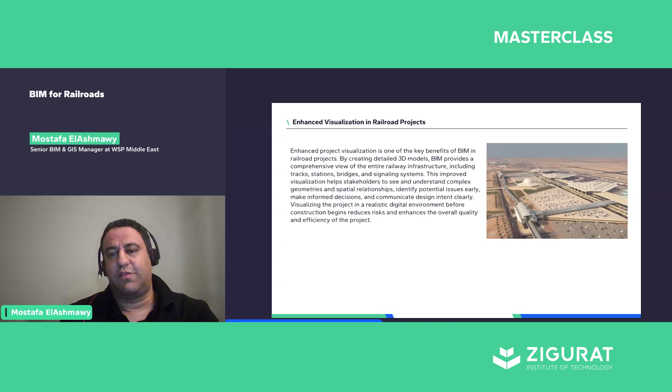Another important part is design coordination, and it's a fundamental benefit for using BIM in railway, involving all the engineering disciplines in the same space in a proper common data environment, enabling them to collaborate. In today's world you have designers scattered all around the world, and you need these teams to work together in an efficient way. You can't do this without BIM and a proper common data environment that hosts the BIM model with cloud-based solutions.

This is where various engineering teams can work together, including the structural, electrical, mechanical teams, and also the specialized teams that can have their specific BIM models for any miscellaneous equipment or wagons, for example, or any other elements of the railway modeled in BIM also.

BIM addresses this challenge of coordination by integrating the designs of all disciplines into a single federated place. If you previously had a look at ISO 19650 standards, when it comes to coordination and federation of models, the example used in these standards is a railway project where a volume strategy should be developed at early stage to ensure spaces are reserved for specific systems inside the cross section of the railway, to enhance collaboration and enhance clash avoidance.

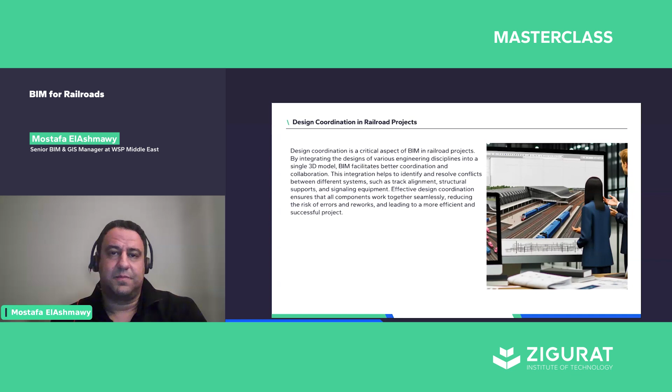Yeah, and as we speak about coordination, for sure we must mention clash detection. Clash avoidance is an important concept when we are designing a railway project, and it's one of the aspects that's usually developed at early stages. So imagine you are developing a railway in a tunnel, for example. Every service has its allocated location from an early stage.

I would say that clash detection is not something very specific to railway, but as I mentioned, the size of the project means such saving using clash detection from early stages is multiplied when you talk about railway projects.

Parametric design in railway is also one of the advanced features that BIM offers, and it offers a significant advantage for railway projects because it's not only about going and modeling and drafting every single detail, but there are values that can just be added to develop the model quickly, saving a huge amount of time in that development.

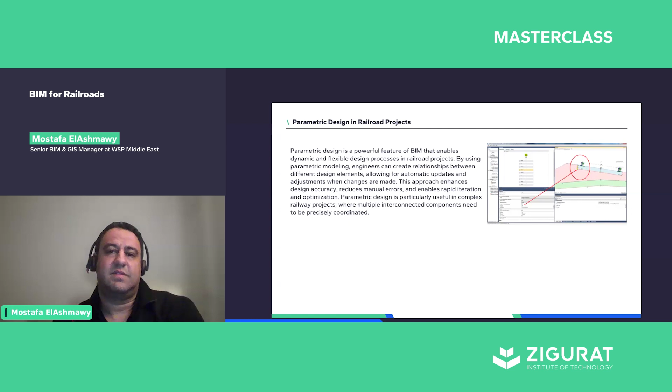Once they input the new values, this saved them huge time and also avoided them waiting until they had all the information. So they were able to start with some dummy data, and then once they had the proper information, they were able to complete their work.

Enhancing design accuracy is an important part that BIM adds to the process. It doesn't require a lot to mention that having the elements developed in 3D, and having the views reflect any change at the same time, enables designers to have an accurate and more efficient way of developing the finer details.

One of the important aspects that BIM adds to the process is improving stakeholder engagement. As I mentioned, using BIM, it's much easier if, for example, you used a platform like Autodesk Construction Cloud or Revizto or whatever solution. It's much easier to ensure that everyone has access, and even some platforms currently don't require advanced BIM use.

You can enable access to the in-progress design or the approved versions of design to any kind of stakeholders, the usual stakeholders in construction projects, and also the community itself. You can enable the community to see how such a railway project will impact their current homes, their current commuting, and all aspects of their life.

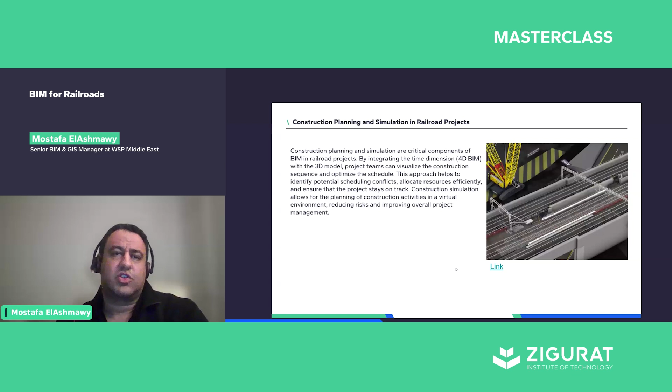Using 4D in such a project is not only about having a simulation of the project from start to end, but it can help in resolving specific issues in specific locations, where you can not only involve the railway components but also the external and existing roadways, existing temporary roads, any temporary elements used in construction, any equipment, to understand the impact of the steps of construction on the surrounding environment.

BIM also enhances quality control and documentation in these projects. Usually quality checks were done based on drawings and just checklists, but having these models that show the site teams the end product means they have something to actually compare with, and it saves a lot of time.

This digital model becomes a source of truth that can be accessed by quality teams to ensure that the proper physical asset is developed similar to the digital asset. Also, having the BIM model and the concept of a common data environment makes the control of documentation much easier. So specific drawings can be linked to specific models, and specific models can be linked to specific packages.

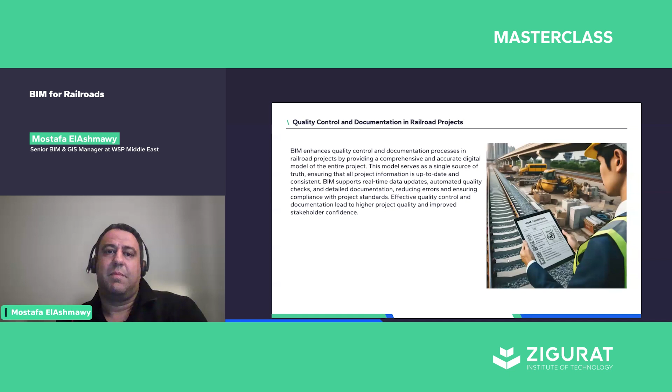The way of managing documents has improved a lot with BIM, and the role of the information manager, which purely can be considered a BIM role, is now very intersecting with document controlling roles. So document controlling and BIM are about to be considered a very close function. BIM is enhancing document control, and document control currently can't ignore the BIM processes and the common data environment processes.

Another essential point that BIM adds to construction is real-time data updates, and it's a significant advantage in railway projects, because with these huge projects, it's hard for everyone to memorize which areas are built. Even if it's reported daily or weekly, whatever the frequency or accuracy of reporting, it's hard to comprehend all these updates without a proper BIM model that can reflect these updates whenever they happen.

When it comes to post handover, BIM has huge potential. To be frank, not BIM alone—BIM together with GIS and all the digital engineering is becoming an important part for the post handover. From our perspective as BIM experts, the main concept that supports this is the asset information model. Asset information models in railway are a critical component, because the life cycle of such a project goes for tens of years. The Riyadh Metro project, for example, was designed for at least 100 years, and most of these projects are designed for much more. That's why the asset information model, from my perspective, is a real deliverable of BIM. Yes, we use BIM for construction to ensure we deliver the proper project information model, but the deliverable that will be used much more is the asset information model.

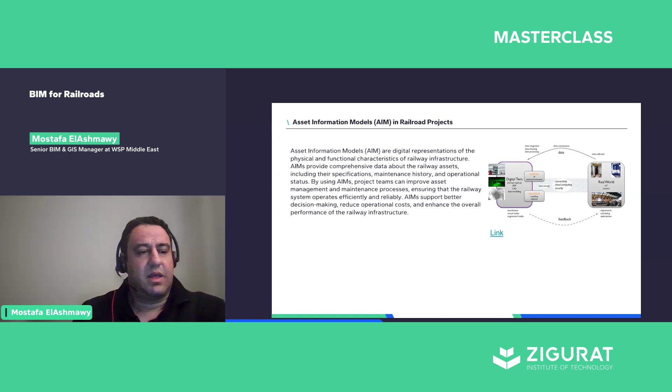It should capture the as-built status and also any additional parameters that can help the asset operators or facility managers operate such a complex project. It's becoming seen in many projects where they try to make use of BIM models, whether linking it with IoT or any kind of management devices or sensors, to ensure that whatever data is captured is seen in a 3D environment that can then enhance decision making for maintenance, for management, and to report the condition of tracks, bridges, signaling systems. So BIM is becoming the core for the concept of having a digital twin that links the physical asset with the digital asset.

Another aspect where BIM is helping is maintenance planning for railway. Maintenance planning is a critical aspect in managing railway. On the long term, the performance and reliability of railway assets depends on regular and effective maintenance activities. BIM can play a critical role in supporting such planning by providing accurate and up-to-date information about the asset, including the condition, maintenance history, and operational status. One of the primary benefits of using BIM for maintenance planning is the ability to access detailed and accurate information about the railway asset.

This digital model captures the data related to the asset together with design specifications and O&M manuals—all this kind of information is already captured there. So this can facilitate the planning of this maintenance.

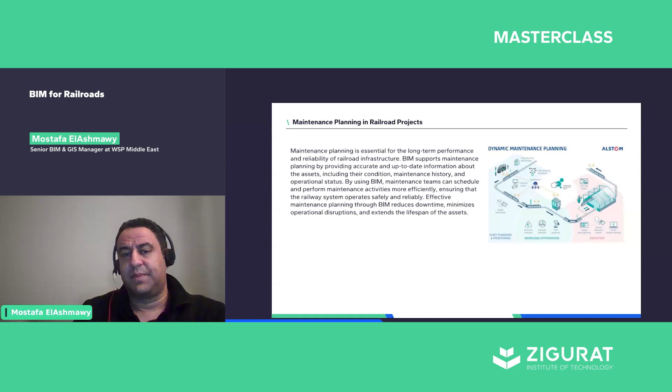In general, BIM also plays an important part for sustainability and efficiency in modern railway projects. As the world moves towards more environmentally responsible construction practices, having BIM in this process helps achieve such goals, because it provides better control on construction projects, and in return we have more sustainable and efficient design. One of the primary benefits of BIM is its support for environmental impact assessment on the project. There are many projects currently using BIM to calculate carbon emissions and to achieve zero emissions. It's becoming more and more used recently, seen in many projects where BIM acts as a cornerstone for sustainability and efficiency in projects.

In the next section, I'll speak about the tools and workflow that we usually focus on in the master's. However, for sure, there are other alternatives, and the design and planning of railway systems usually undergo changes over the years. Recently, the advancement in the tools used for design has supported the development of the design.

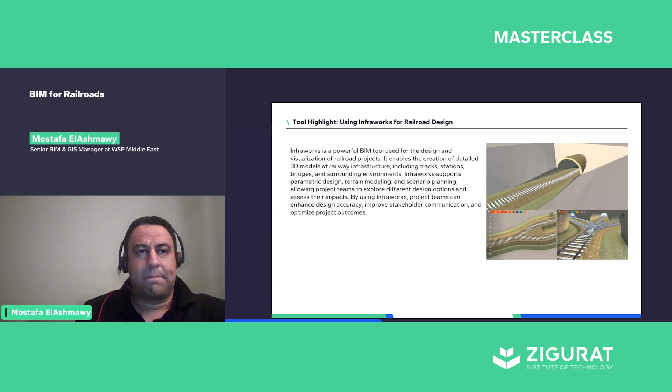Then we go also through Civil 3D, covering its railway tools to understand the link between Autodesk InfraWorks and Autodesk Civil 3D, and where this can import to that. For example, we can get a proposed alignment based on a study in InfraWorks into Civil 3D, and then complete the design there, or start the design from scratch in Civil 3D.

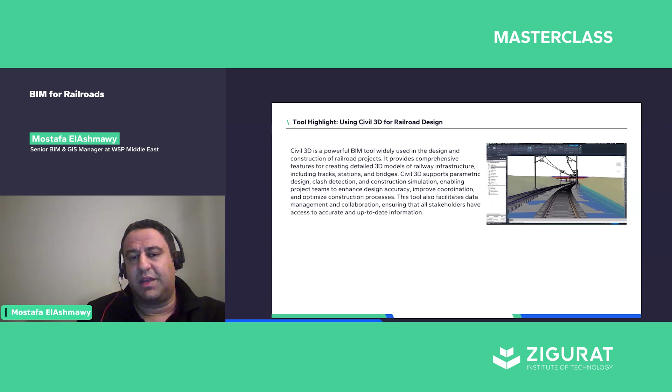The good thing about both solutions is that they have proper understanding of the GIS context and the geospatial context, where everything is geolocated based on a proper coordinate system. So we go through such details to ensure that our design is situated in the correct location, and this is non-negotiable in railway projects.

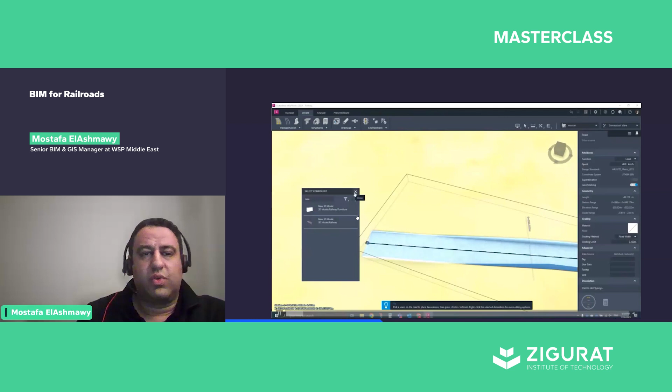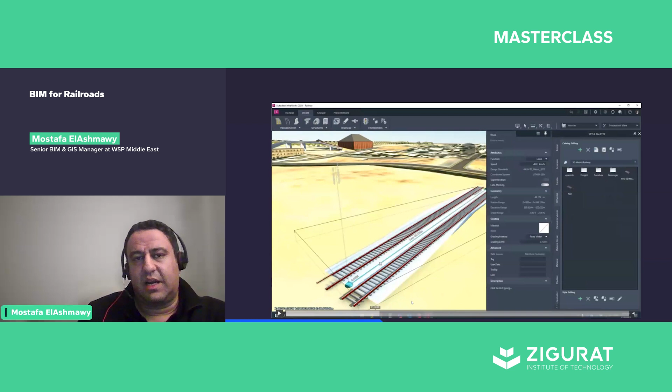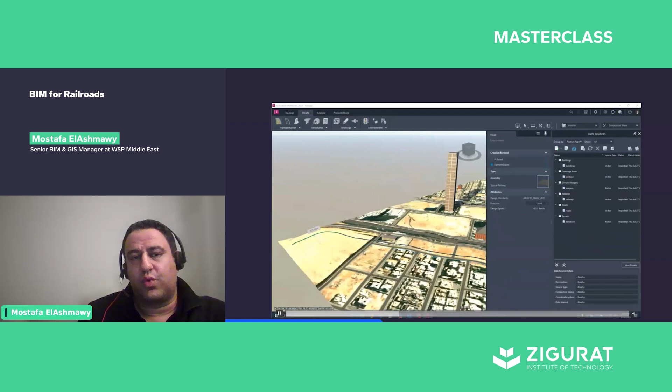In this video, this is a quick brief on how the tools of Autodesk InfraWorks are used. In InfraWorks, for example, they have a tool for railway, but also an important tool related to roads called Component Road, one of the most advanced tools in InfraWorks, where you can have your railway designed and seen compared to the context of the city. For example, this is part of Riyadh city, where we are developing a railway that will go through a specific location, and we are able to see the impact of this railway on the existing roads.

And where we can add, for example, a bridge, or add a tunnel for going through the existing environment. Using InfraWorks, it's very easy to control the profile and provide an acceptable, detailed design at the very early stages, so that we can take better decisions.

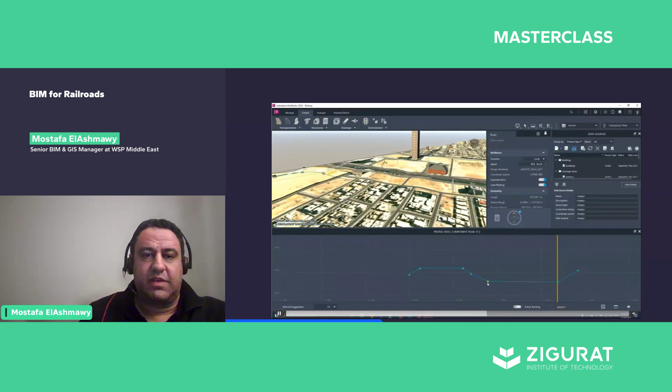An important part also of using Autodesk InfraWorks is its ability to export into both Civil 3D and Revit. Using Autodesk InfraWorks, we are able to export the railway path, for example the alignment and the component of the railway, into Civil 3D, and we are able to export the structural elements like the tunnel or the bridge into Revit, and work on them to detail them further there.

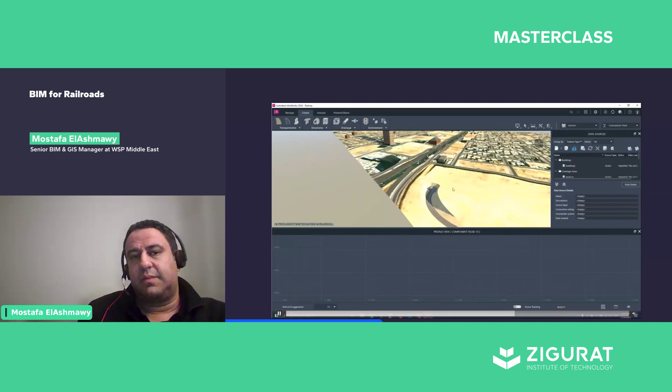So, I'm just being aware of time, and I want to allow some time for questions. So I will not play this video to the end, but yeah, I think that was my last part in this session.

Great, Mostafa, thank you very much. So Mostafa is joining us from Australia, so I appreciate the time, the time difference is huge. So I'm going to address a couple of questions that are more related to Zigurat, and then I'll let you address the rest, okay?